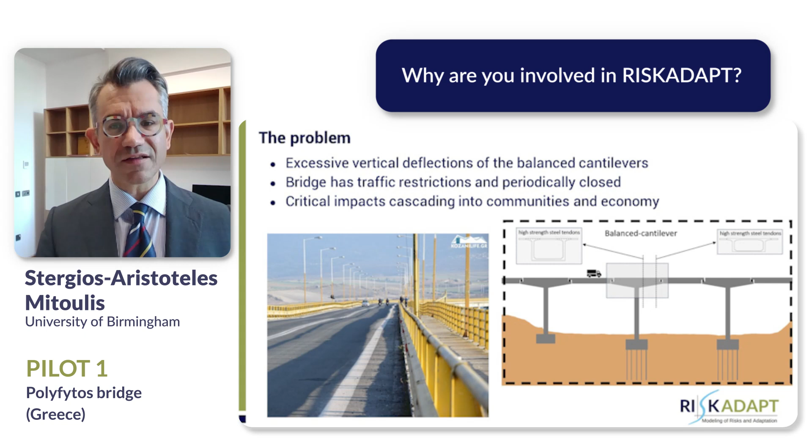Nowadays, excessive deflections are recognized as a well-known, persistent problem in balanced cantilever bridge construction methods across the world. These deflections eventually lead to serious displacements, potential damage, and possible infrastructure failures. In the Horizon project RISKADAPT, we aim to analyze its risks and produce practical tools to promptly adopt measures and avoid infrastructure failures of the Polyfytos Bridge.

The key results of the RISKADAPT project are to assist the complicated process of pairing observations with actual damage states, allow earlier detection of damage, and enable more timely and cost-efficient restoration actions. This will help us avoid late damage detection in the future, which can lead to extensive socioeconomic consequences and cascading events related to climate hazards.

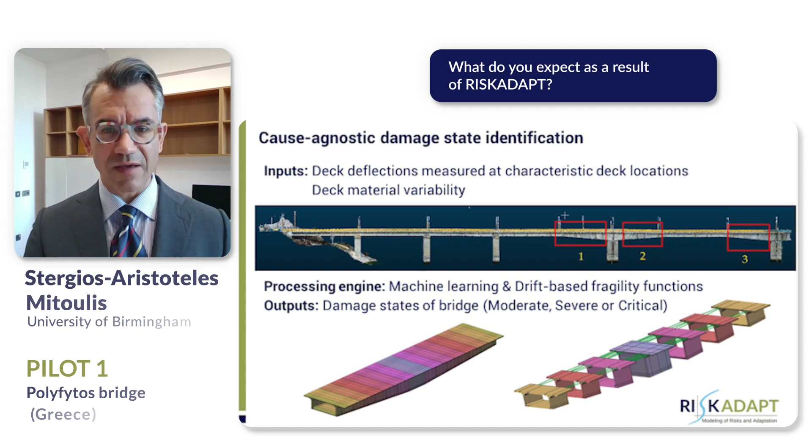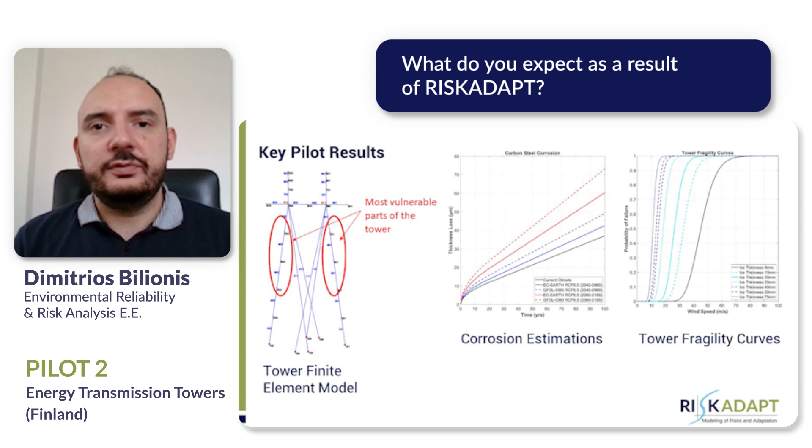We expect that the interdisciplinary approach of RISKADAPT will lead to gaining knowledge of the underlying processes triggered by climate change, and to providing relevant stakeholders with a tool for estimating the structural risk of power transmission lines and the socioeconomic impact of possible failure events.

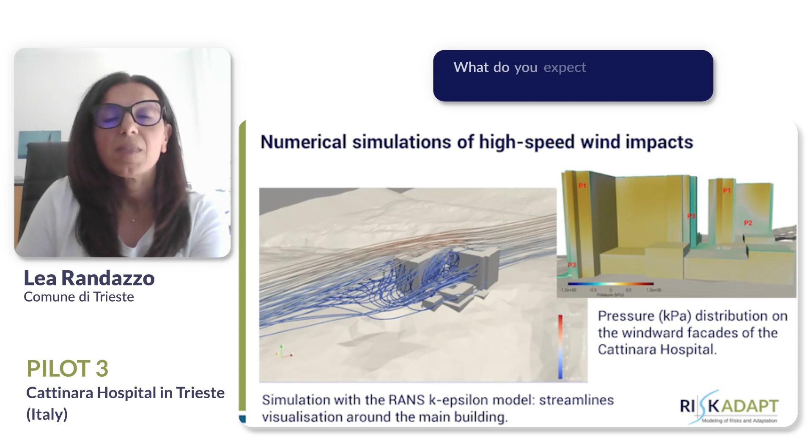We expect to improve our knowledge and collect relevant information on the impact of extreme events. We will use project data and results also for updating the local building regulation.

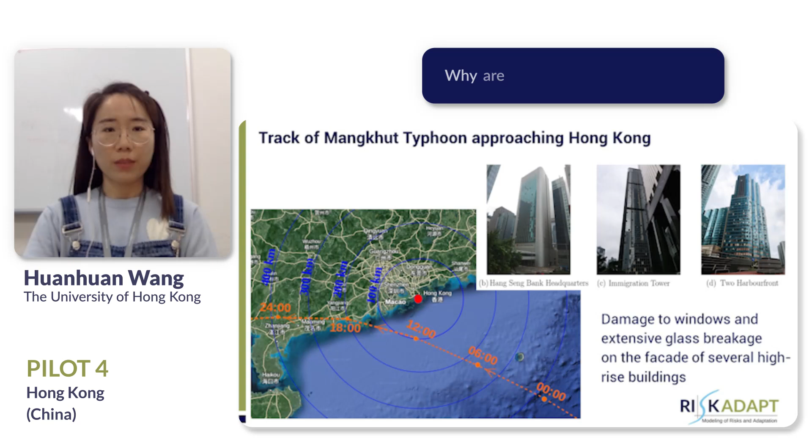Our chosen three structures for study are mainly high-rise office buildings. The window glass shattering during a typhoon can be life-threatening and business-damaging. We hope to have a holistic study considering that climate change introduces more intense typhoons. Hopefully, we can identify the exact causes, which would be useful for building code requirements.